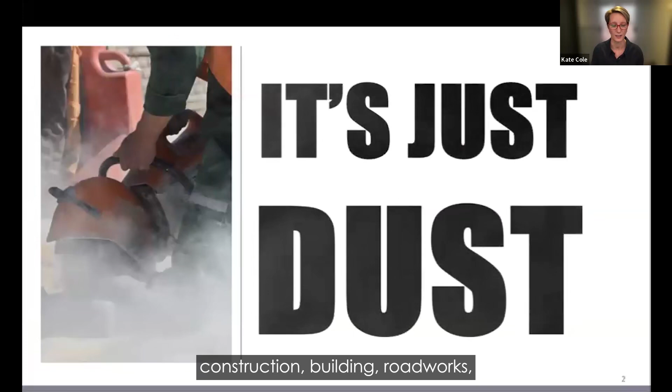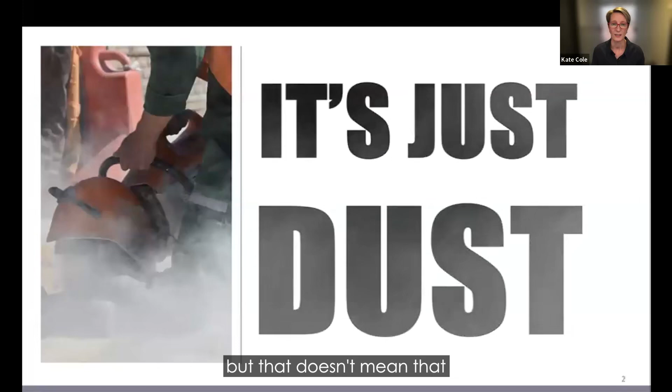So firstly, I'm sure you've all heard this before, it's just dust, right? So when we see activities in construction, building, roadworks, demolition, stonemasonry, or tunnelling, we normally see dust as well. And it's become quite commonplace to see dust in these types of industries, but that doesn't mean that that dust is harmless. In fact, it's quite the opposite.

So I'm going to take you through a high-level awareness package on silica dust today in tunnelling. It was originally developed by the Air Quality Working Group of the Australian Tunnelling Society that I led back in 2018. But it's still very relevant today because it's helpful in explaining the risks of silica dust, where exposure is high, and most importantly, how it can be minimised and how you can keep yourself safe.

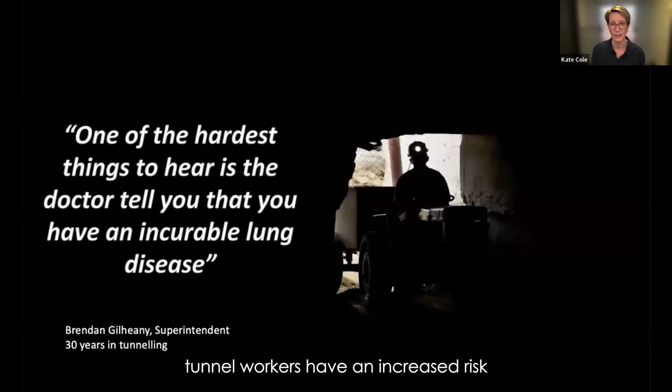So one of the hardest things to hear is the doctor tell you that you have an incurable lung disease. Tunnel workers have an increased risk of developing many diseases compared to those in the general construction industry, and the biggest ones are silica-related diseases like silicosis. That's why preventing your exposure to respirable crystalline silica, or what we commonly call silica dust, is so incredibly important.

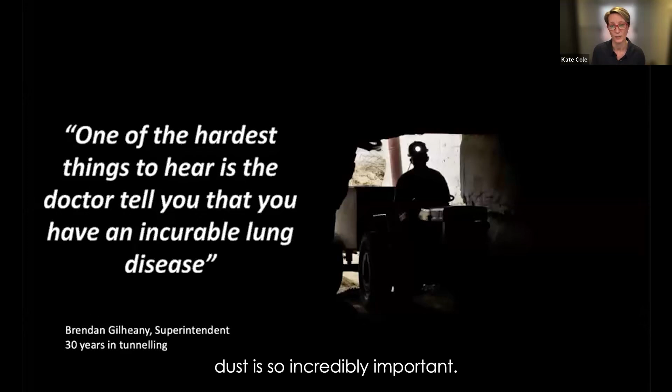So broadly, cutting into quartz or crystalline silica containing materials like sandstone or shale or concrete creates dust and silica. So high risk or very high risk tasks in tunnelling include, first of all, just tunnelling in general into rocks like sandstone and shale, but it also includes shotcreting, including using the wet methods that we do. It includes drilling and grouting, cutting into concrete, and things that happen all the time, like heavy plant transporting spoil.

It also includes things like loaders picking up and moving spoil around that might be in a spoil shed, for example, and really common tasks like relocating ventilation.

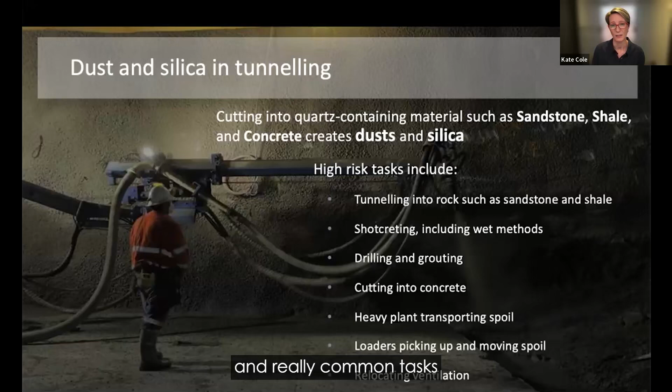So in tunneling, obviously most things are underground, so it's actually what you can't see that is the biggest problem. Silica dust is really small, more than 15 times smaller than a piece of human hair, so it's very difficult to see it underground.

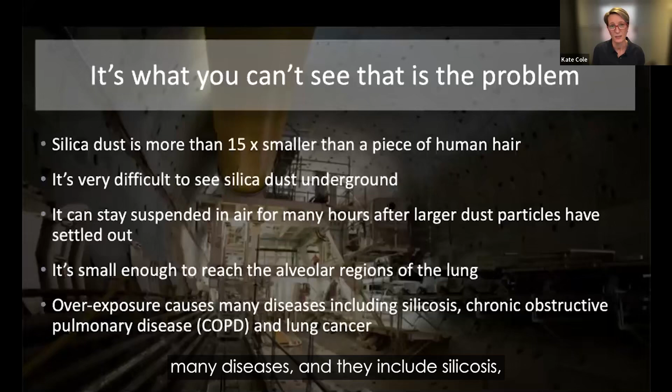And because it's so small, it can stay suspended in air for many hours after the larger dust particles have settled out. And because it's so small, it can reach the really tiny parts, or the alveolar regions, of our lungs. We know that overexposure to silica dust can cause or increase the risk of many diseases, including silicosis, chronic obstructive pulmonary disease, and lung cancer.

Silica exposure can come from anywhere, even from clothes covered in mud that are washed. So it's not just cutting at the tunnel face that we focus on. We have to focus on anywhere that dust can be created or liberated throughout the workday.

So I mentioned that we can't see it, and really it's what we can't see that is the problem. It makes it quite challenging. Some work groups will need to use things like ventilation, dust suppression, respiratory protection or masks in areas where it doesn't even look dusty. But it's really important that we always follow site rules on dust control, even if we don't see the dust, because those rules and safety processes are there for a really important reason.

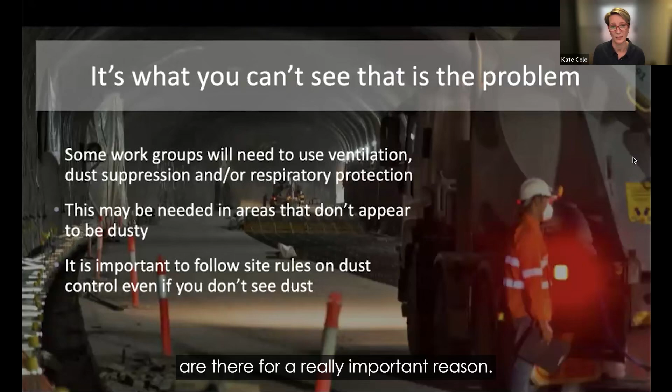So I mentioned overexposure can cause a lung disease known as silicosis and lung cancer. We're really familiar with silicosis from the media and the latest regulations around the ban on engineered stone, which was so incredibly important. But it's not just the engineered stone industry where this is a risk. In fact, this is also a risk in many industries, including in tunnel construction.

Diseases like silicosis and lung cancer have no cure. The symptoms include things like chronic dry cough and shortness of breath with exercise. In tunneling, silicosis usually results from a chronic, lower level of exposure over time, but there are other forms which can be fatal within months as well.

These diseases are typically diagnosed through health monitoring, which includes lung function testing, X-ray, and in some cases a CT test as well. Diseases like tuberculosis and rheumatoid arthritis are more common in people with silicosis. And even after removal of exposure from tunneling work, like finishing work in the industry, silicosis can still progress.

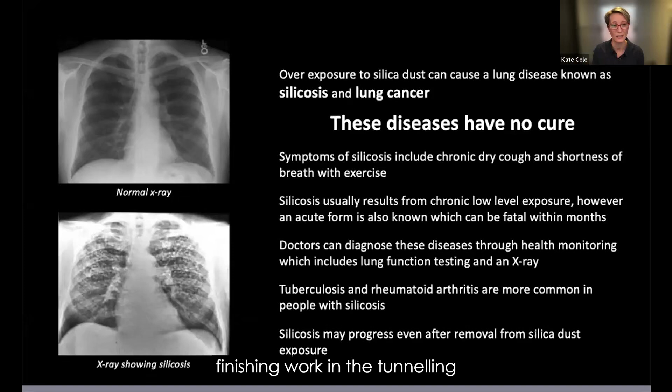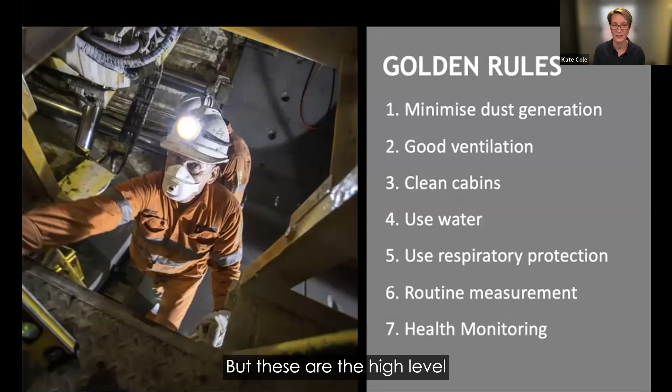So at the Australian Tunnelling Society, in the Air Quality Working Group, we came up with around 7 golden rules. Of course, when you're working in tunnel construction, there are many more systems and processes in place to keep workers safe, but these are the high-level 7 rules that are recommended.

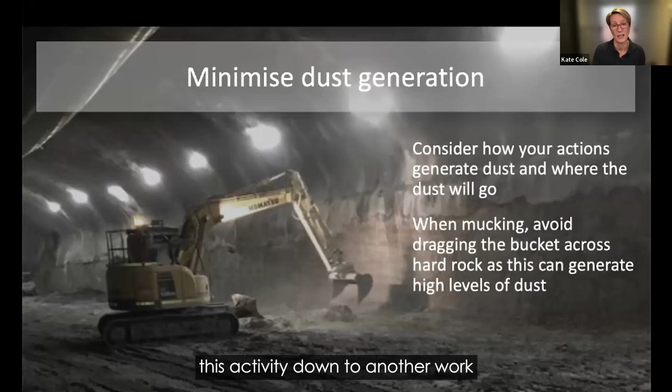So the first one is around minimizing dust generation, considering how the actions of one work group will impact the exposure of another. Maybe the simplest example is when mucking out with an excavator, thinking about how this dust-generating work is going to impact somebody downwind of me, where the ventilation may carry the dust generated from this activity down to another work group, and what can I do to prevent that?

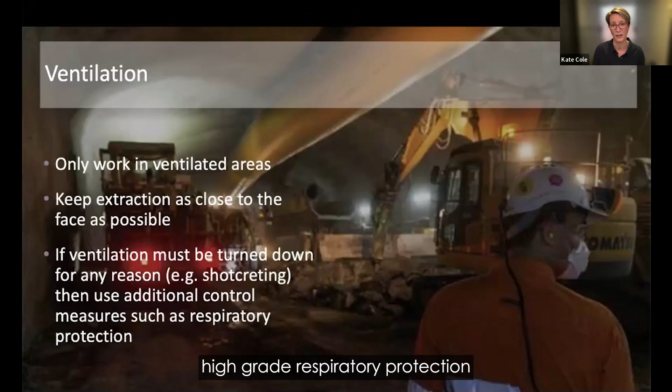The next one is ventilation. Of course, while most areas underground are ventilated, they're not all ventilated, so we only work in ventilated areas and don't access areas that aren't. Working to keep dust extraction as close to the face, or as close to the source, as possible is absolutely crucial. And keeping in mind that if ventilation is reduced or turned down for any reason, that means we're really going to have to up our controls in other ways, such as the need for really high-grade respiratory protection.

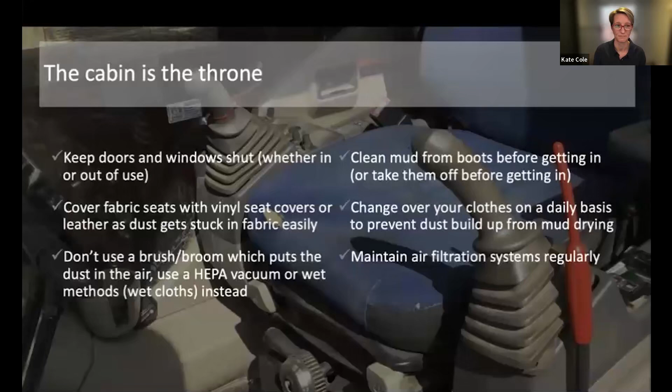The cabin is the throne.

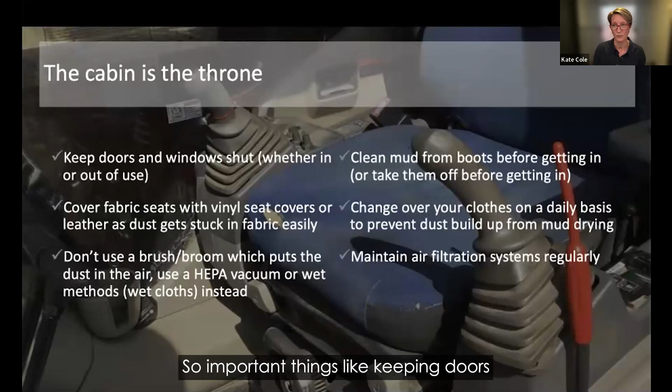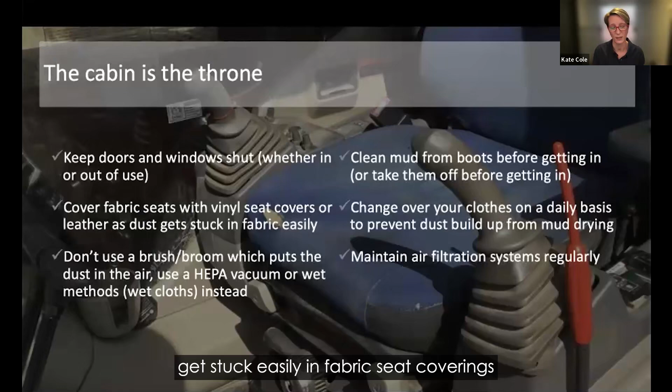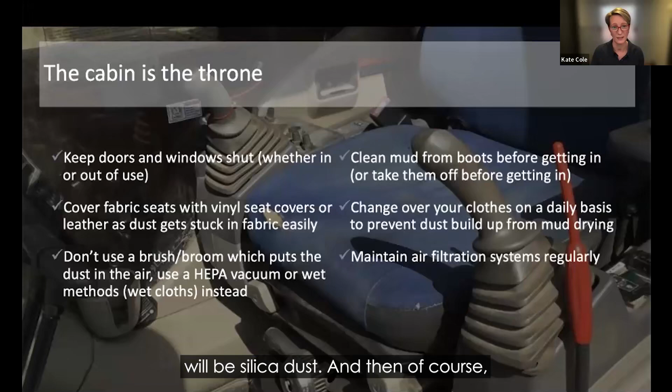We use a lot of heavy plant, underground heavy plant, and this can be a key source of exposure to some workers. So important things like keeping doors and windows shut even when they're not in use, covering fabric seat covers with vinyl or leather to prevent dust being liberated, because dust can get stuck easily in fabric seat coverings. Making sure that heavy plant is cleaned using wet methods or HEPA vacuums, and not using brushes or brooms, which would just liberate dust and silica into the air. And most importantly, cleaning mud from boots before getting in cabins, or taking them off before getting in, because that mud will dry up over time, and within that dried up mud will be silica dust. And then, of course, changing clothes and maintaining air filtration systems is really, really important.

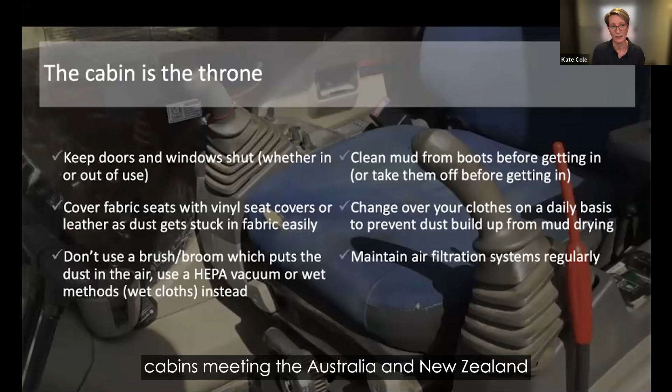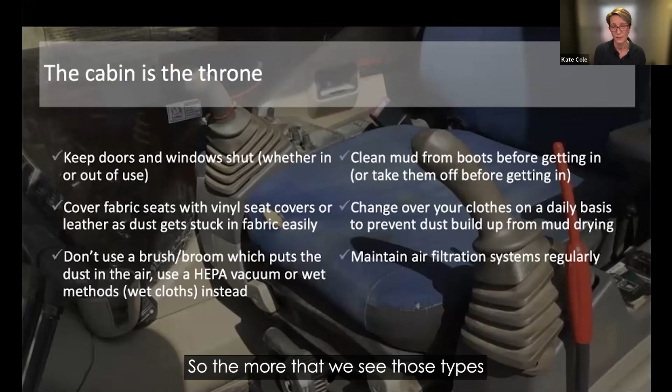These days, we are seeing more and more cabins meeting the Australian New Zealand ISO standard 23875, which is an international standard adopted in Australia for air quality control systems for operator enclosures. They essentially use enclosed pressurized cabins, offering greater protection. So the more that we see those types of systems implemented underground, the better we will all be.

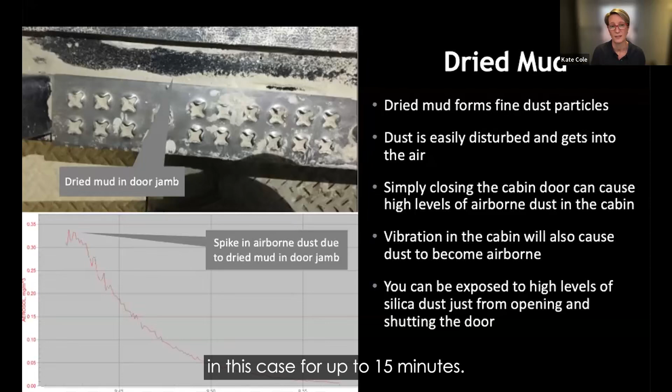An example of the impact of dried mud on exposure is shown here on this slide. Something as simple as not cleaning out the door jamb and then shutting the door to an excavator, for example, will liberate that dried mud and dust into the air of the cabin. And that dust will stay in the cabin, in this case, for up to 15 minutes. So every time the door is shut, it's 15 minutes of exposure to dust containing silica. So it shows just how important it is to keep heavy plant cabins clean.

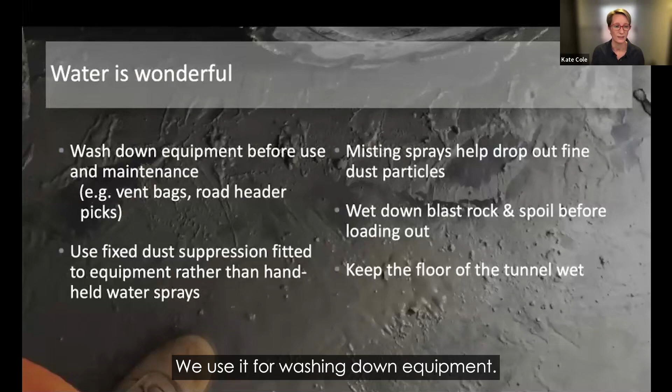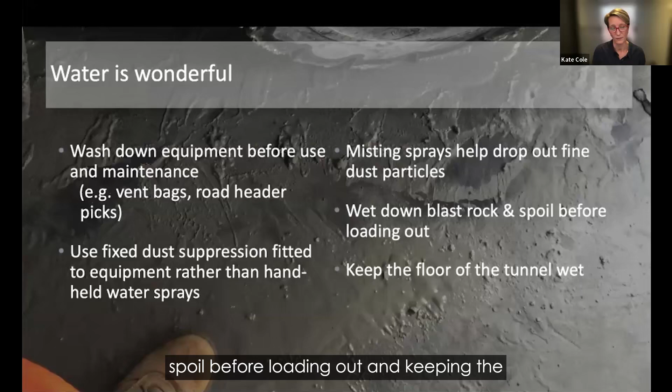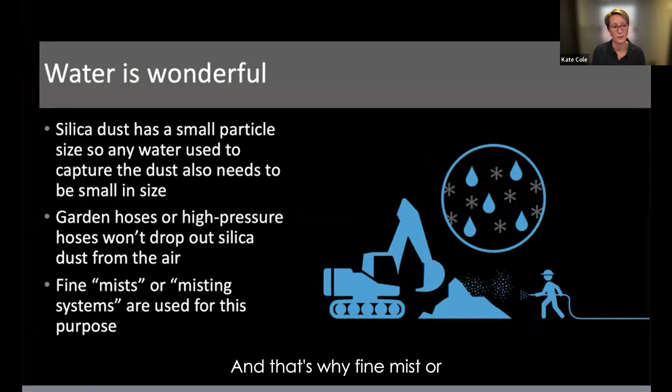Water is wonderful. We use it for a lot of purposes. We use it for washing down equipment. We use fixed dust suppression rather than having someone on a hose. We use misting sprays, and of course things like wetting down blast rock and spoil before loading out, and keeping the floor of the tunnel wet, are all used to suppress the dust to prevent it becoming airborne in the first place. But the challenge with silica is that silica dust is really small, so it has a tiny particle size. So if we're using water to try to capture the dust in the air, then our water also needs to be really small in size. That's why we use misting systems rather than garden hoses or high pressure hoses to try to get silica out of the air, and that's why fine mists or misting systems are quite common.

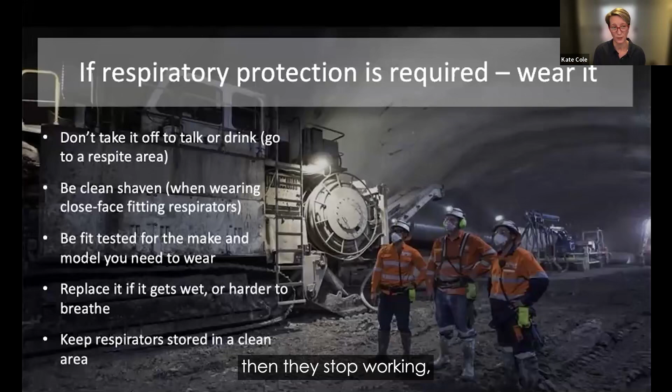And because we use a lot of water, it can present a challenge, because disposable dust masks, if they get wet, then they stop working. So we have to replace them.

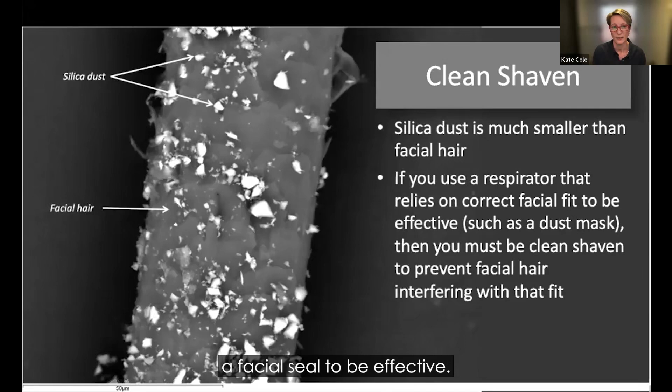Your tomorrow's health is about the actions you take today. Wear your dust mask for you and your family's sake.

I can't stress how important it is, even in areas where it doesn't look like it's dusty or we can't see silica dust, that if it is signposted to wear respiratory protection, that it's worn every single time.

Silica dust is small, I've mentioned this many times. It's invisible. The only way we know how much is in the air is if we measure it. And the measurement of silica dust needs to be done regularly to understand if the control measures or the safety processes in place are actually working effectively.

Occupational hygienists do this monitoring. They fit pumps and cyclones to workers and they measure dust over a period of a shift. Then the filter inside that sampling media goes to a laboratory, and that's how we figure out how much dust and silica a worker may have been exposed to.

Silica dust exposures have been measured to be more than the workplace exposure standard in tunnelling routinely. This means that personal exposure monitoring or air monitoring and respiratory protection is used a lot.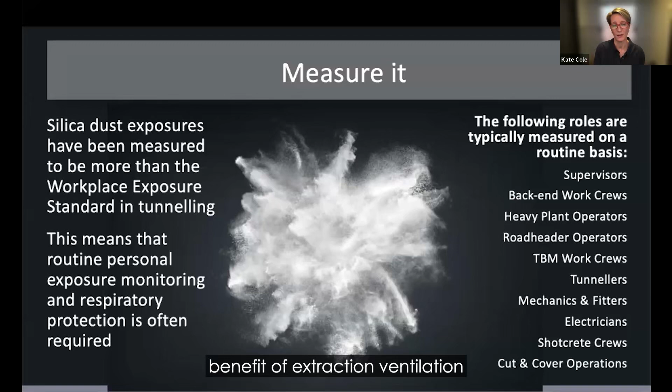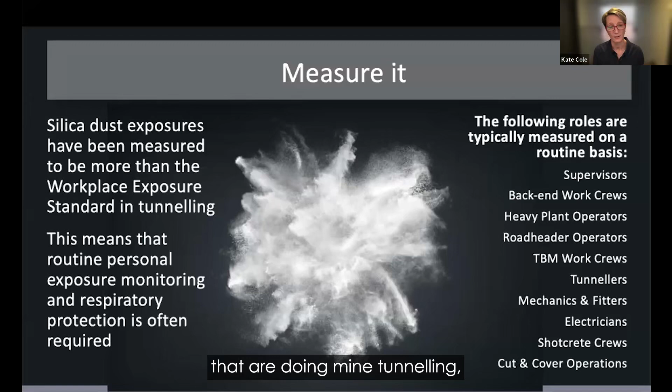The second would be back-end work crews, because they don't always have the benefit of extraction ventilation at the front of the tunnel. Then obviously heavy plant operators where we don't have good pressurized cabins, roadheader operators doing mine tunnelling into really high crystalline silica containing rock, TBM work crews on tunnel boring machines, in addition to general tunnellers, mechanics and fitters, electricians, shotcrete crews, and those involved in cut and cover operations.

Health monitoring for crystalline silica happens before you start work, and then it should be repeated every year. This health monitoring picks up any changes to your lung function and can detect early stages of silicosis and other lung diseases. Typically, the standard health monitoring for crystalline silica includes a questionnaire, a lung function test, and an X-ray.

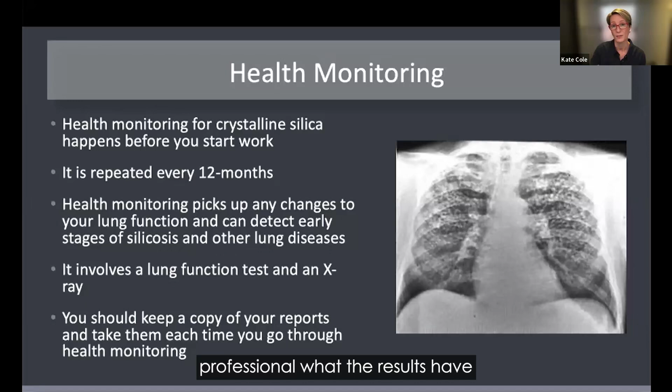But thankfully, we are seeing more situations where there are additional investigations being performed, such as CT scans where necessary. And I recommend that you keep a copy of your health monitoring records and take them each time you go through health monitoring, so you always have your records and can show your medical professional what the results have been previously to help track your health over time.

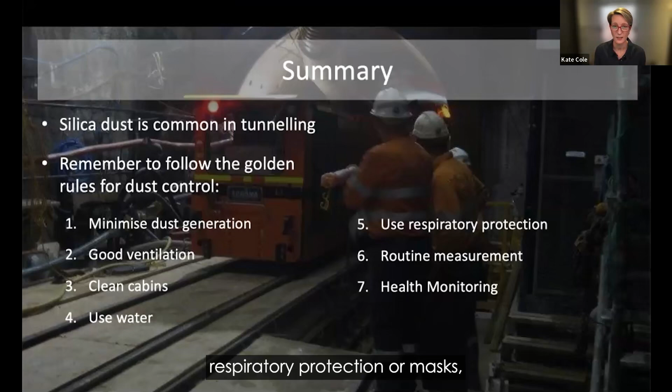So in summary, silica dust and silica dust exposure is very common in Australian tunnelling. There are 7 golden rules: dust control, minimising dust generation, having good ventilation, clean cabins, the use of water, the use of respiratory protection or masks, routine measurement of silica dust, and also health monitoring.

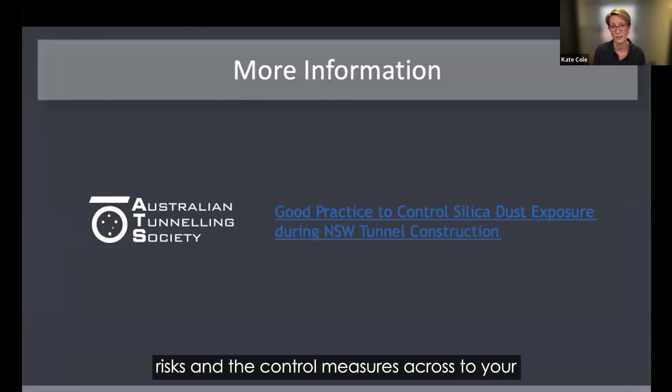All of these slides that I've just shown you are freely available on the Australian Tunnelling Society website under the Working Group Papers section. They should be hopefully helpful for you to share with your teams, your colleagues, your mates. Use them to help communicate the risks and the control measures across to your team.

As Kerstin said, I am undertaking research in silica dust in tunnelling. So for those of you on this webinar who may have worked in Australian tunnelling, I invite you to have your say about your experience in tunnelling and exposures to respirable crystalline silica, which is really just an opportunity to contribute to further research into silica-related diseases like silicosis in the tunnelling sector.

This is from the University of Sydney, and we're looking for people who are interested in taking part in this voluntary survey about your experiences. We're looking for perspectives from a range of people, including employers, workers, and occupational hygienists.

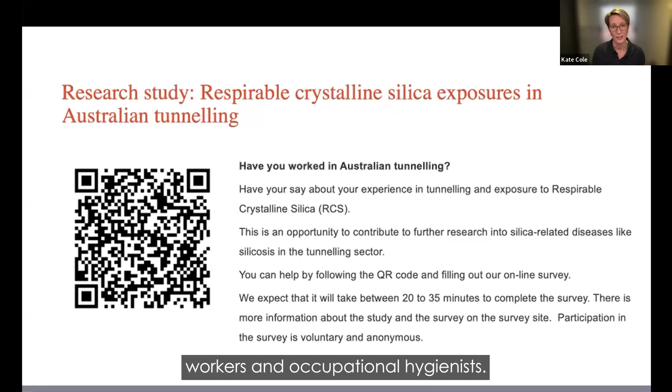The information collected aims to provide researchers with a better understanding of the barriers and enablers to silica-related disease in tunnelling. You can help by following the QR code and filling out the survey, which should take between 20 to 35 minutes to complete.

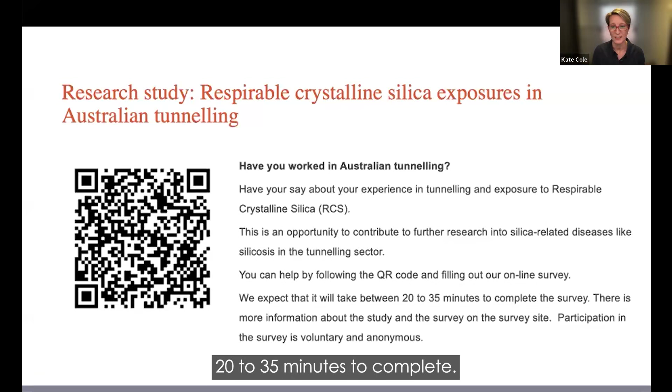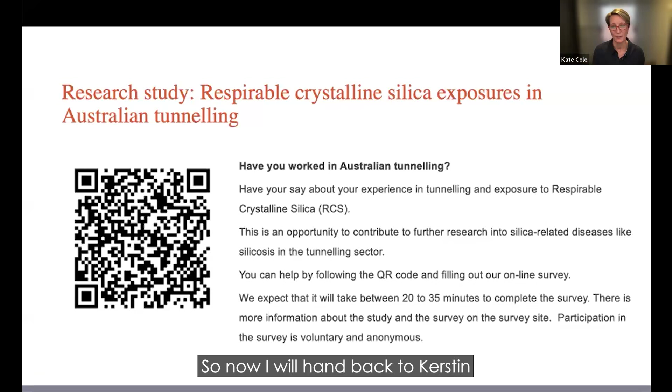So now I will hand back to Kerstin, and I look forward to your questions after Nikki's fabulous presentation. Thank you so much, Kate. That was a really informative and engaging presentation. It was so great to better understand silica dust in the tunneling construction industry and how workers can protect themselves, particularly those 7 golden rules.

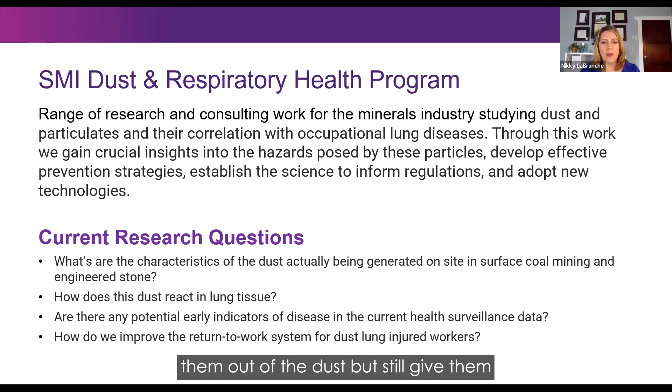And as the project just mentioned, we've got a return to work project for dust lung injured workers, especially as we're detecting these dust lung diseases earlier, with people who still have hopefully a good working life ahead of them, and how to keep them out of the dust but still give them meaningful work.

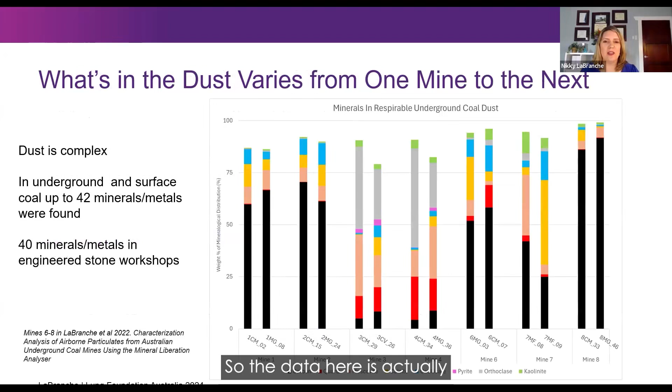So with what we've been doing at the university with the characterization, we've found that number one, dust is very complex, and it can vary from site to site and mine to mine. So the data here is actually the underground coal mines, and I've paired the continuous miners with the main gate samples, which are typically taken 6 to 8 just inside, in-by that main gate corner.

And for those, you can see that what's in the dust is more controlled by geology. So for one mine, within the mine, it's relatively similar from one area to another with little differences by cutting, but from one mine to the next, depending on where you are, what seam you're in, it can vary substantially.

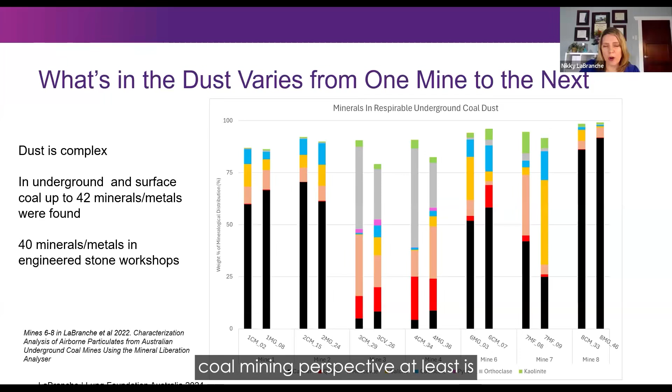And there's 42 mineralogies that we've been finding, but I've only put the top 8 here. The ones of interest from a coal mining perspective, at least, is the black, which is the carbon, but the red is that quartz or silica dust. And that can vary substantially from one seam to the other.

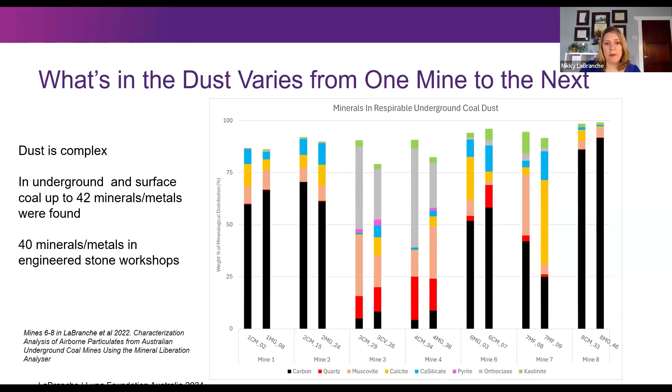And even with that, what's in your cutting horizon in a mine might not necessarily be what's in that dust that's reporting to the respirable fraction. Because in that respirable fraction that you're breathing in, that less than 10 micron size, you do have selective breakage of the rock. And so we're finding, not just in my work but overseas as well, that you do get significantly more stone in that makeup than you do carbon from the coal seam.

And this mine 3 here is just one example of that. So for everybody, something to keep in mind: what's in the host rock and what you're mining may not necessarily be what you're breathing in, in the same proportions, because of that selective sizing.

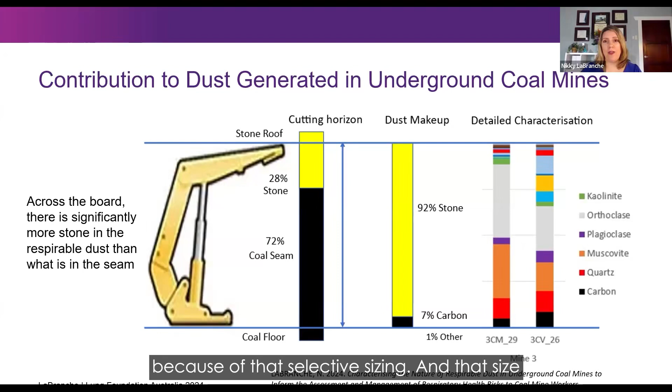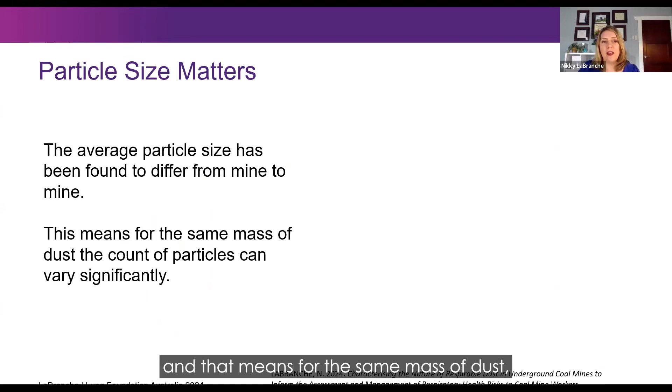That size actually really does matter. We've found that the average particle sizes do differ, and that means for the same mass of dust, the number of particles you can get can vary significantly. In the studies we've done in underground coal, that can vary from 1.8 to 4.8 microns in size, which doesn't sound like very much, but when you put them to scale next to each other, that little 1.8 micron particle could probably fit 4 or 5 of them inside that larger 4.8 micron particle.

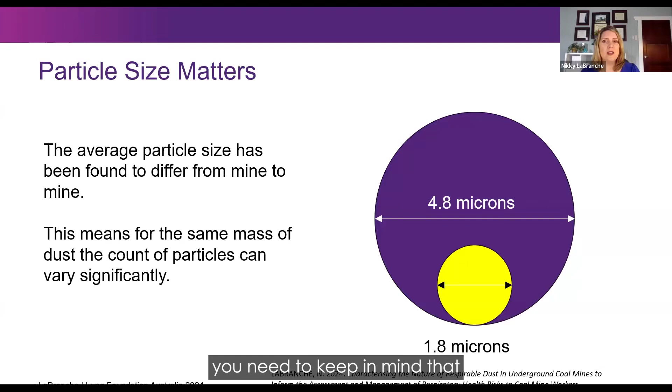However, you need to keep in mind that this is actually a 3D problem, so you can get many more particles of the smaller size for the same volume as one larger particle. I've done the math on what the total dust count would be for a single 8-hour shift: at 4.8 microns, that's 10 billion particles, and at 1.8 microns, that's 197 billion particles. So that's almost 20 times the number of particles for the same mass of dust that we're measuring.

Those smaller particles actually have a greater probability of penetrating deeper into the lungs, to the alveolar region that Kate talked about previously. So it is those much smaller particles that we really do want to be sure we are capturing.

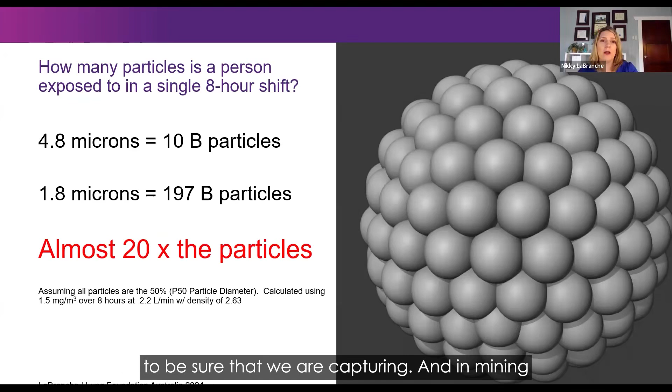In mining, we use water for our dust suppression. For the most part, that is the most popular method used. It's very important that you have the right size water droplets for the dust you're trying to impact and agglomerate and fall out of the air, because due to the surface tension of the water droplets, the dust can actually just go around them if the water droplets are too big. So you want those much smaller particles to be able to impact the dust.

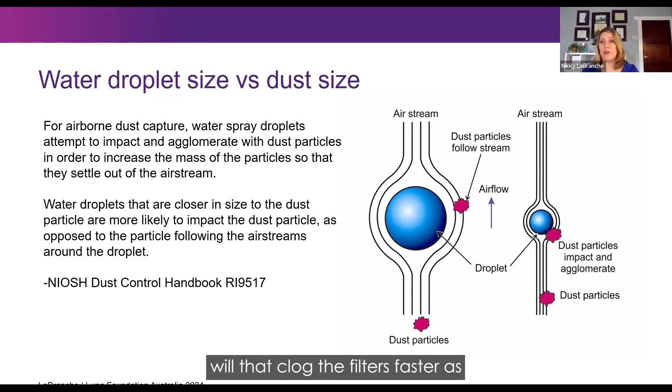That has to do with what nozzles you pick and the locations you put them in to get that right droplet size. The more you can control this dust at the source, the more downstream benefits you have as well. It's more useful for maintaining your stone dusting through the mine, less coal dust generated, and less often you'll have to go back and touch up. As well as, if you're looking to do other processes like methane abatement, will that dust clog the filters faster as you're putting more dust through.

I've thrown in some engineered stone here too, to have a look at some of these particles. The black dots in the background, those round holes, are the pores in the filter we're looking at, and those are 0.4 microns in size, just to give you an idea of how small we're dealing with—so less than a micron in size for those dark black holes in the background.

But as you can see, there are very sharp, angular particles. There's definitely a long needle-like particle here that's less than that 0.4 microns wide. Those small particles, especially when they're fibrous like that, can penetrate deeper into the lungs, into the gas exchange region. So there's a reason they've outlawed dry cutting for engineered stone—not a good idea at all, because this is what you'd be breathing in.

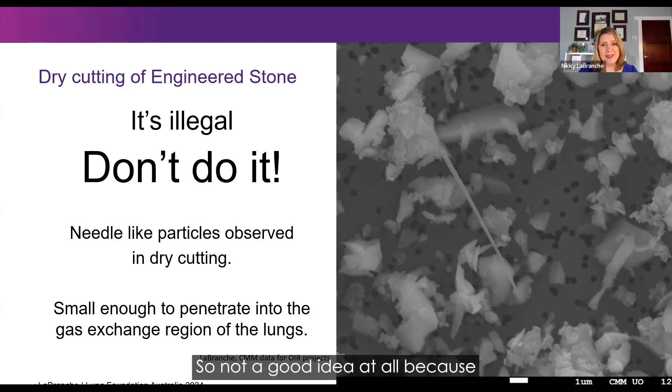Same for polishing too—you're seeing a lot of needle-like fibers in the polishing as well. So it's very important that you've got your primary dust controls in place to prevent them from becoming airborne, as well as using your respiratory protection for these.

So on the Return to Work project, this is a new project that started this year. It's a three-year project sponsored by the Office of Industrial Relations. And I'm pleased to say we have just hired a full-time PhD for the project that'll be helping us out there. There's several stages to the project.

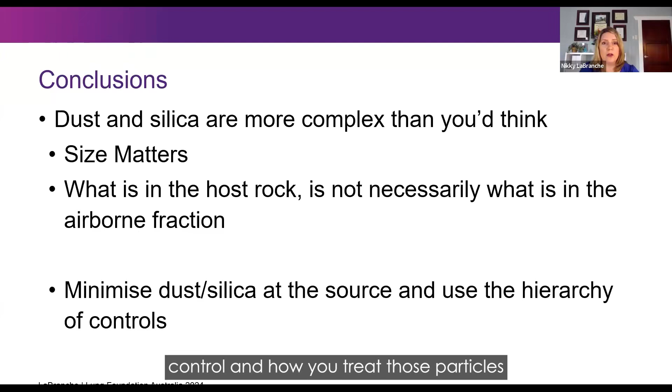But in conclusion, from the work we're doing, we know that dust and silica are more complex than you think, and the size of those particles matter, and that does matter for the dust control and how you treat those particles. And what's in the host rock is not necessarily the same percentages as what's in the airborne fraction.

So we really need to understand what's happening with the silica from that perspective, and Kate gave some great points on minimizing the silica in tunneling, and for mining, a lot of the same things apply. So you definitely want to minimize the dust at the source and use the hierarchy of controls to manage the dust there.

So thank you very much.

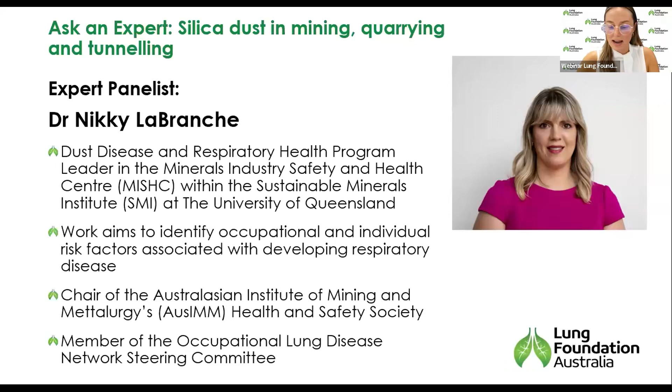First question, I guess, looking at some of the pre-submitted ones. So should we be more conservative around the amount of people we are exposing to chest x-rays or radiation in the context that the silica exposure is low in some above ground mining and the risk approach is not being supported by the regulator and instead enforcing a one size fits all?

Yeah, thanks for that, I'll take that one. So you are getting a dose of radiation from an X-ray, but for a single X-ray, that's actually about 0.02 millisieverts, is what we measure the radiation in. And just to put that in perspective of what's happening, that equates to about 7 hours of flying. So if you're a FIFO worker, you're probably getting more than that in a week and a half, depending on how often you're flying.

We also do have a background radiation level here in Australia, so you're looking at about 1.5 millisieverts per year for what you're getting. So significantly higher than that 0.02 for a single X-ray. So yes, it is a dose, but it is a very small dose given the potential benefit of being able to identify these things early.